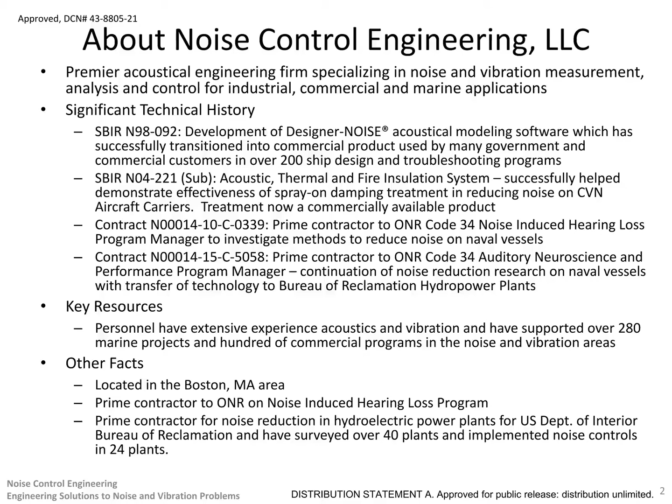Now on to the specifics of our current SBIR project. In the interest of helping lower the risk of noise-induced hearing loss, Noise Control Engineering was awarded a Phase 1 SBIR grant to investigate how to reduce noise from abrasive blasting nozzles. These are used extensively in maintenance applications, not only in shipyards, but in many commercial and industrial settings.

Abrasive blasting is used for paint and surface coating removal and refurbishment at shipyards, maintenance facilities, and factories, and in manufacturing, bridge and building construction, and civil structures such as dam spill gates at hydroelectric plants.

The physics of a blast nozzle are similar to that of an aircraft engine exhaust nozzle, producing very high noise levels. However, unlike an aircraft engine, the operator of an abrasive blaster is very close to the noise source, which can reach noise levels as high as 130 decibels and presents a significant hazard for hearing loss. The objectives of our research are to reduce nozzle noise levels by 20 decibels and increase nozzle efficiency by 20%.

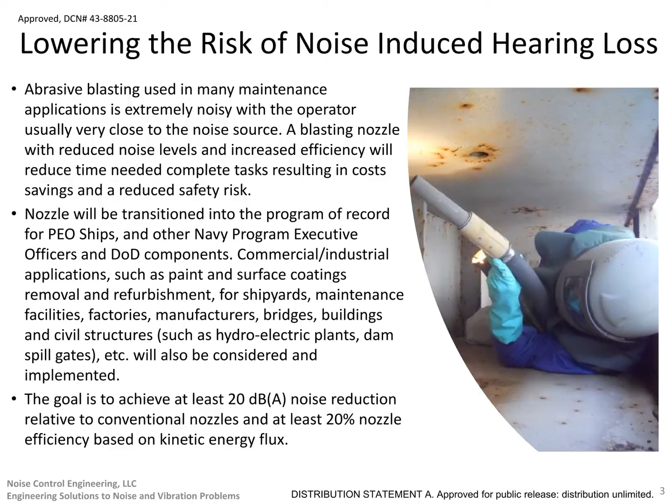Greater nozzle efficiency means operators will be able to finish their work faster, and the less time they spend blasting, the less time they will be exposed to blasting noise overall. By achieving our objectives, hearing loss and safety risks will be reduced, speed and performance will be increased, and the cost of completing the activity will be lowered. Proprietary methodologies are being employed to reduce turbulence-generated noise, as well as other factors that generate high noise levels.

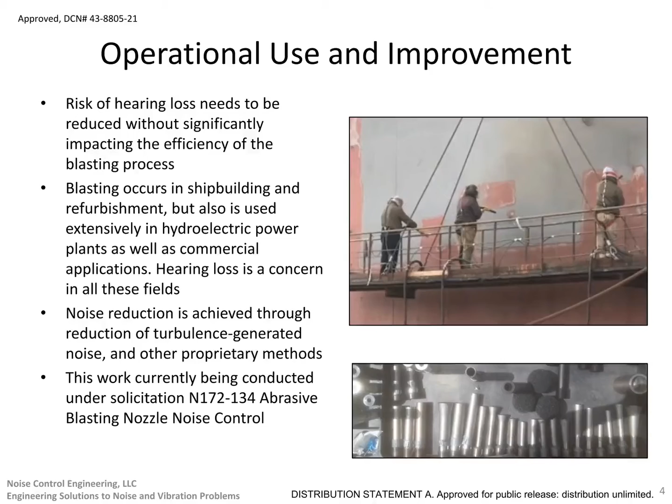Noise Control Engineering's extensive acoustic testing experience and modeling capabilities have enabled us to make progress towards our objectives. Our methods include modeling blasting abrasive and air in nozzles using computational fluid dynamic techniques, using these computational fluid dynamic results as inputs for acoustical models to predict noise, performing optimization of geometries to reduce noise and increase efficiency, manufacturing and testing prototype nozzles, correlating test results with models and making updates, and repeating our design optimization test feedback loop to continue design improvements.

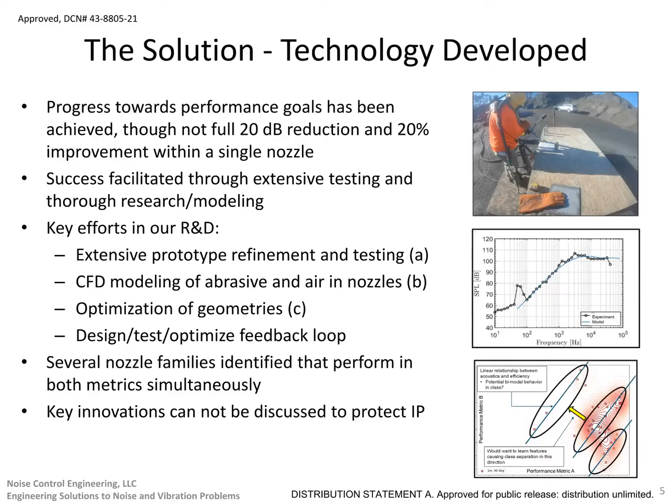We are currently working in the SBIR Phase 2 option period, and as with previously successful projects, the project is currently on budget, on schedule, and is progressing towards meeting project objectives. The approach we have taken, that of design, manufacture, test, and refine models based on the test data, has been successful in progressing towards the project goals.

We are currently developing our third set of prototype nozzles and have a number of candidates which perform well in both noise and efficiency. We are continuing to explore nozzle configurations and features in order to find the optimal design that will decrease noise while also increasing nozzle efficiency.

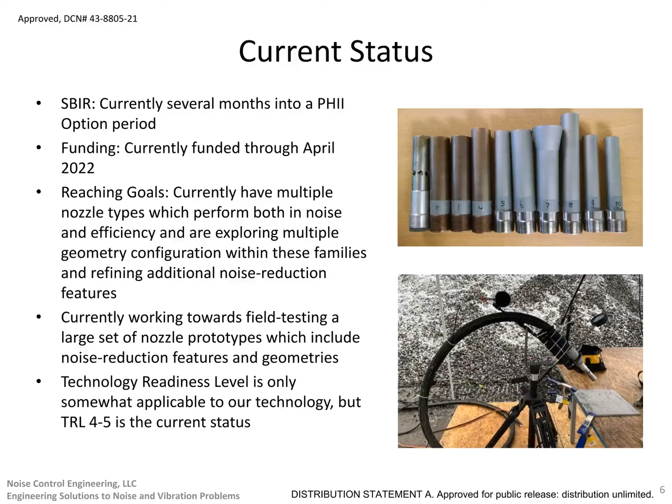As previously discussed, decreases in noise levels and increases in efficiency will reduce safety risks, increase nozzle performance through higher efficiency, decrease time needed to perform tasks, and result in cost savings to perform the work. The net effect of this successful product would be an increase in task performance while reducing the cost and time to perform an

abrasive blasting task. To digress slightly to our capabilities, Noise Control Engineering has been very successful in the past in developing technology to reduce costs, increase performance, and even improve schedules. One example of this is our buoy acoustic measurement system known as BAMS.

BAMS was internally developed using our own resources and is deployable when underwater radiated noise compliance and diagnostics are needed. It is a portable device that provides affordable, calibrated underwater sound pressure measurements. It can be deployed anywhere in the world for design acceptance, recertification, diagnostic tests, and other compliance type assessments without requiring a fixed underwater noise test range.

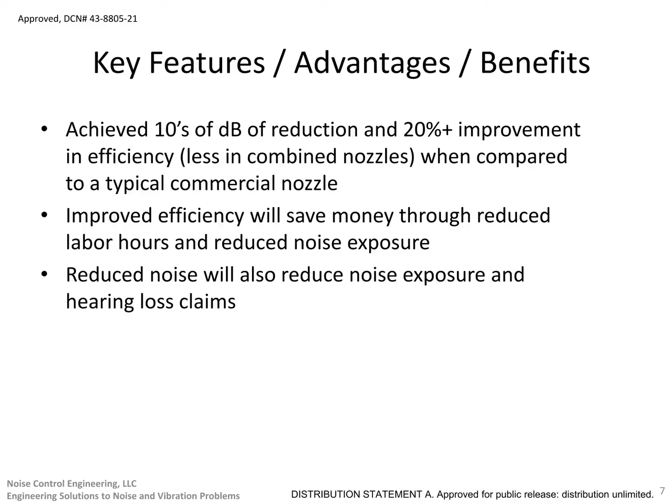This capability costs about one-tenth as much, if not less, and takes significantly less time than having to transit a vessel to an underwater range and pay high range fees for its use. BAMS can also help ship owners and operators understand underwater radiated noise and identify mitigation strategies, and our engineering services group can provide underwater signature assessments to determine compliance with design and environmental objectives. Cost, performance, schedule, very important parameters.

As abrasive nozzles are pretty much a commodity item, the likely transition to the fleet will be through some sort of catalog purchase, probably GSA. The options for the manufacturing part of the transition are still under consideration and will be discussed in a subsequent slide, but we have a history of success in transitioning technology.

The Designer-NOISE software and the damping treatment have already been discussed, but success has also been achieved when technology developed under our ONR contracts was successfully transitioned to other government agencies, namely the Bureau of Reclamation. In cooperation with ONR, Noise Control Engineering became the prime contractor for reclamation in a major program to reduce noise in their hydropower plants. We conducted noise surveys in over 40 reclamation plants, including the Hoover Dam and Grand Coulee power plants, and have successfully implemented engineering noise controls in 24 of these facilities, significantly reducing noise levels.

The success of these land-based projects has direct applicability to NAVFAC, the Naval Facilities Engineering Systems Command. Among the responsibilities of NAVFAC is the construction and maintenance of many of the U.S. Navy's land-based facilities, including but not limited to naval shipyards and naval-based facilities, housing, medical facilities, engineering and training centers, as well as shore facilities. Many NAVFAC facilities are in high noise areas, and based on our experience with reclamation, we have the proven expertise to help reduce noise and lower the health risk for personnel working and living in high noise facilities.

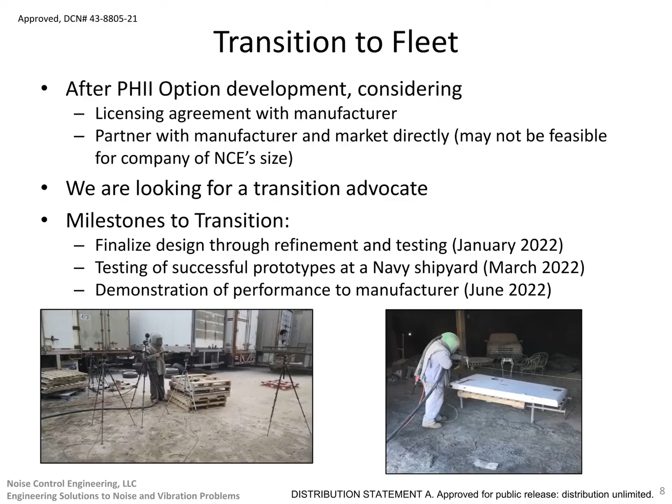Getting back to the current SBIR topic, the global market for abrasive blasting nozzles is estimated to be about $200 million a year, with an expected growth rate of 5% per year over the next 7 years. A more efficient and quieter abrasive blasting nozzle has commercial applications across several major industries. The marine industry represents the largest market opportunity given the widespread use of abrasive blasting in naval shipyards and maintenance facilities. The automotive, construction, aerospace, metals and mining, and oil and gas industries also utilize abrasive blasting for a variety of purposes.

Conversations with marketing managers and technical experts affiliated with manufacturers and distributors of abrasive blasting nozzles have indicated a high level of interest in quieter and more efficient nozzles.

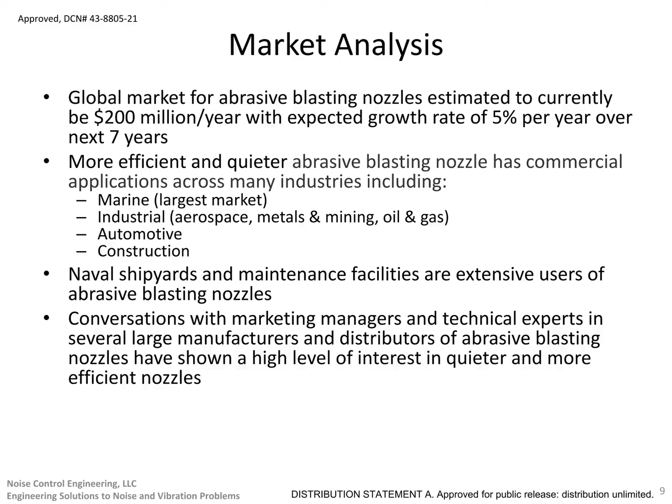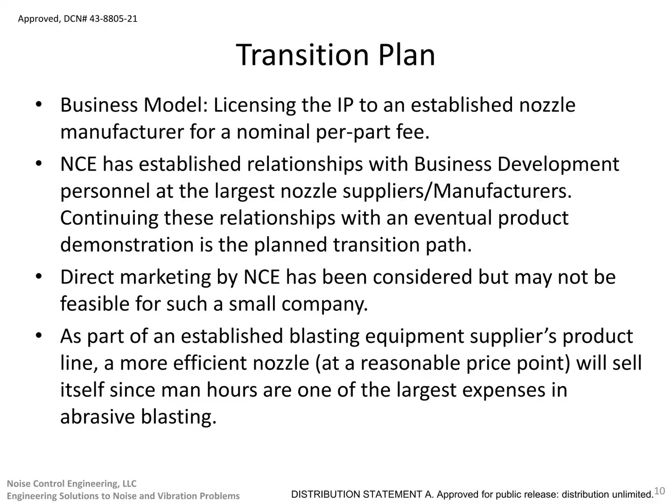We envision two options for our transition plan. These are a licensing agreement with a manufacturer, which is likely, or a partnership with a manufacturer and market directly, which is less likely. Discussions with several existing manufacturers suggest that a more efficient, reduced noise nozzle could command a premium price point. We will use our past experiences with successful transitions, as has already been discussed, to develop an effective transition process for the quieter, more efficient abrasive blasting nozzle.